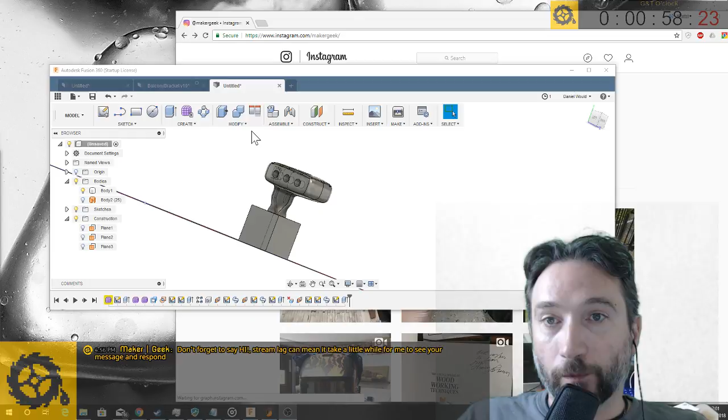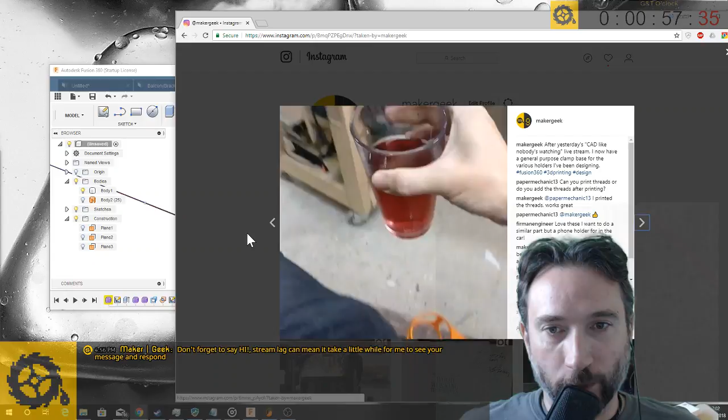Only a couple of pictures to offer, but yesterday in this very show we were modeling up this bracket, which I printed overnight, bracket and screw clamps, so I could take the various mounts I've been using that started out as mounts for my balcony railing, and now I'm like, well, I can multifunction and use them. The screw threads work fantastically, fit really nice and snug, didn't have to do any adjustments, just right off the bed like that. Here I'm attaching it to a little side arm that I put on the side of my Franken chair, which if you look back a couple videos on YouTube you'll see, and just checking it out as a place to hold my drink while I spin on my chair.

So very happy about how that came out. That was some excellent work yesterday. This little experiment of spending time on CAD is already paying off as I actually do make more things.

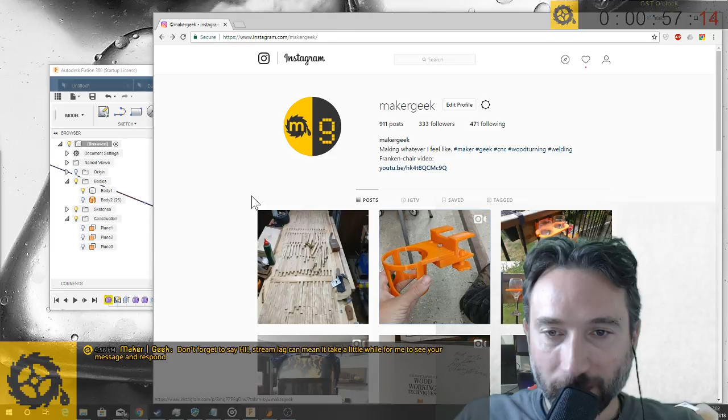The other thing I spent doing, which has been my perennial background task, is CNCing all of these tiny little pieces of wood into little ripples for this absurd door idea I've been working on. It is coming along. I've got all the pieces done pretty much for 2 of the 3 panels, starting on the 3rd. Most of these aren't really stuck down or finished yet. I want to make sure I keep everything in line, so I'm probably going to get as many of the pieces done as I've got, and then start gluing up vertical lines all the way through all panels and across that way. So that progress abounds.

Anyway, let's talk CAD, my goodness. Yesterday at the end of the stream I was starting to play a little bit in sculpt mode, and I decided to spend a little more time on that this morning, so I wanted to show what that looks like.

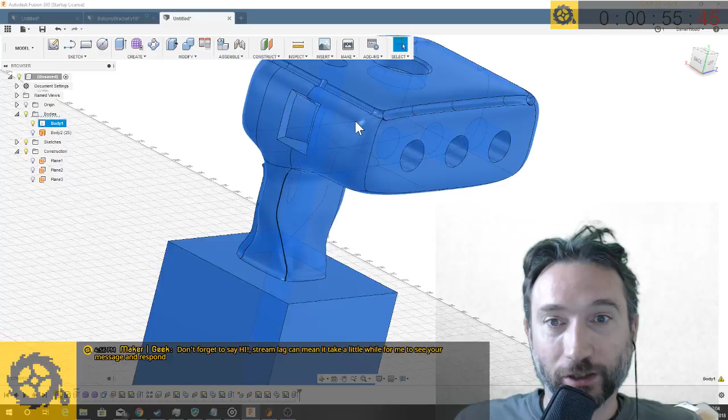Now this isn't anything in particular, this was just me experimenting with creating a sculpted object and bringing it back. So this is now a body - literally this body. It's a regular solid cube attached to this thing, and I've cut various bits and bobs into it just to experiment with what that means. At the end I'll probably go back into Sculpt and revisit some of this stuff to get it more settled in my brain, but I'm really starting to see the power of that. I think it's going to be quite awesome, particularly when I want to do copying of things.

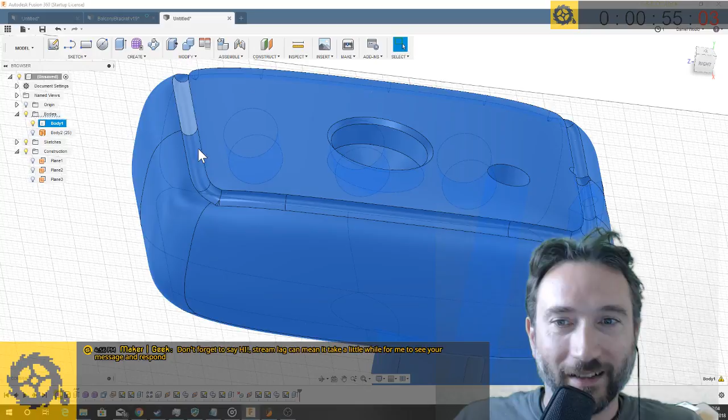My wife is really keen on making a chess set, and I think we're probably going to do that using this mechanism. So I will come back to this later. But if anyone has any questions about sculpt mode and what I've learned in my incredibly brief time playing with it, I would be very happy to try and share that.

In the meantime, I think the main thing I'm going to spend time on today is making a model for dust collection for my CNC router. I've been running it for the door for quite a bit, and I don't have any dust collection on it. I just hoover up after each time, and that works for me most of the time, actually.

But it would be nice to have the ability. I did have one a long time ago, but I've since changed everything around, and I'd like to do something a bit more sophisticated, and now I have a 3D printer, that is an option.

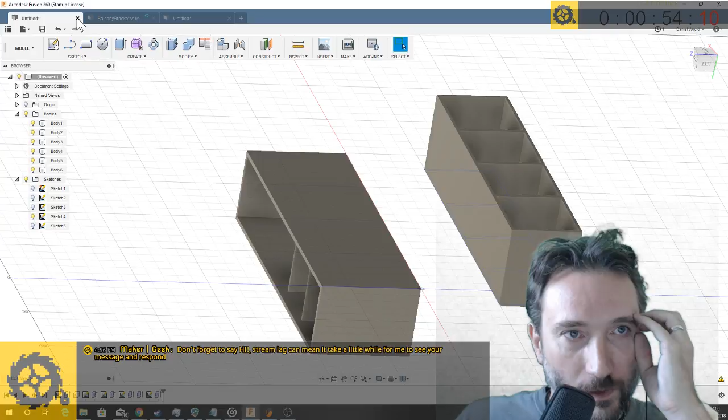So that's what I'm going to focus on. Let's just get rid of some of this stuff. Don't save that. And if anyone has any questions, jump right in and ask them, I will always try and answer if I have them. And if there's anything they want me to dive into whilst I'm doing this, feel free to ask.

Okay, so the main reference point I have for my dust collection is it's an 80mm spindle, and that's pretty much the only thing that is really fixed. I think I have a limited amount of space behind the spindle, so there's a limit to how deep I can go with that.

I'm going to guess that I probably want no more than a 10mm exterior on that. That's not quite right, is it? That would be, I want 10mm either side.

Pretty basic starting point, I guess, which is a ring that will actually fit around the spindle. Now, I've seen some designs where...

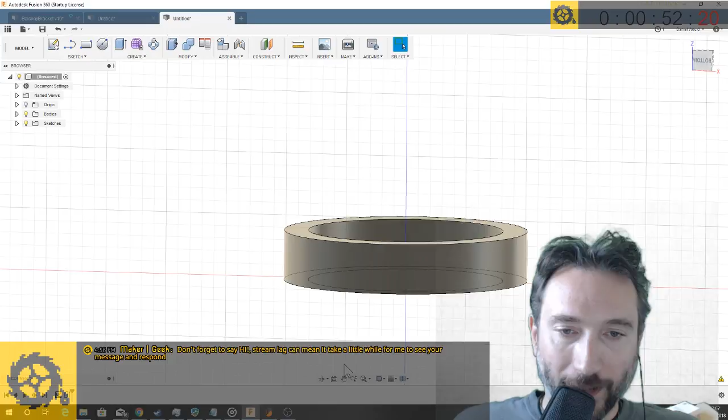it's sort of a two-part mechanism, which is the clamp around the spindle and the holder for the vacuum collection, and then magnetically attaching to the bottom of that the actual dust shoe, which has sort of bristles and such. And I think that is the way I would like to go.

I also would like to figure out how I want to actually clamp on. Again, I've seen a few different options. I might just go for the straightforward approach - cut a slot out of this and put some mechanism that I can use to screw either side.

What I do want is to think about - let's come up here again. Now, the hose port is, well, that's a good question. Exactly what do I want to do? I can probably use the dimensions from my own 3D printed hose nozzle to figure out, but I think we'll go with about 35-ish, and I can always adjust that later if I need to.

Where I think things get quite interesting is trying to allow for the hose to come in maybe slightly at an angle from the main bed. So we're going to try that and see how we get on.

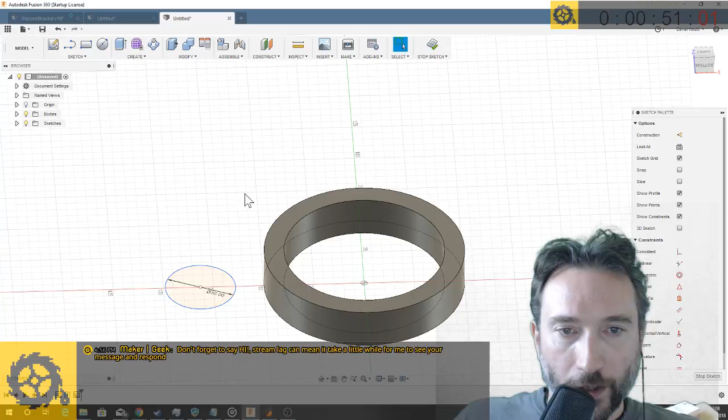So I think the fairly classic profile for these things - let's sketch. I really want to pick up off the edge of there. Actually, let's do this as a spline. Oh yeah, I'd forgotten that they do these new spline points.

That's what I want to do. Come here, turn on the first sketch, that's what I want. Turn off the body. Why is that sketch not active?

Because I'm not on the same sketch. I probably do want to be. Let's delete that bad boy. Yep, forget it, go away. Come back to here.

I want to edit this sketch on this occasion because it'll be convenient to connect things together. So let's just reference off that center line. We'll have 35, and then we will spline ourselves some nice kind of exterior profile that can connect up to that.

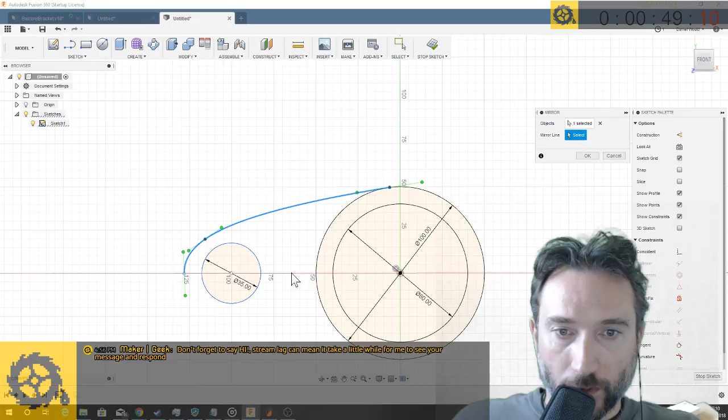And then what we'll probably do is mirror that over. Come on. Oh, I forgot that you don't default to getting the axes as mirrors.

Let's create a construction line. We'll just, that'll do. And then we'll mirror across the construction line. And there we go - nice exterior profile.

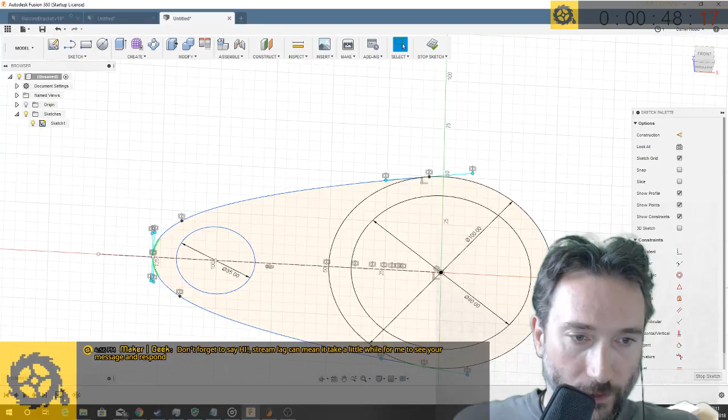So, actually I don't want to do that. I want to come back to here where I'd already extruded. Come on, move the timeline. Oh, stop sketch. Now move the timeline. Modify this extrude to now include that as well.

So, how am I going to connect? The trick with dust collection is you need enough space to not get clogged up with debris, but not so much that you lose suction. So I think a lot of this material needs to come away as part of connecting between these two points.

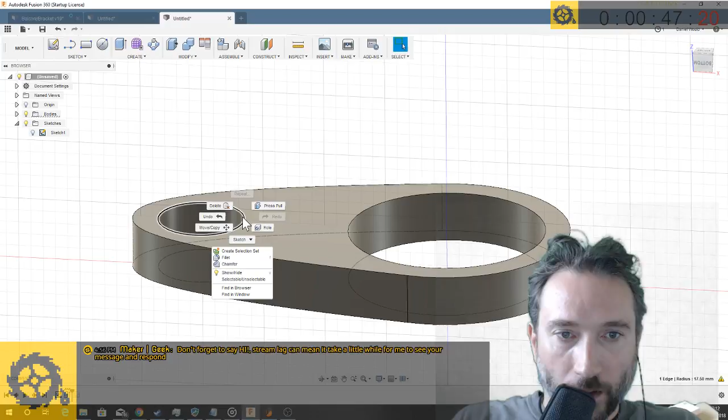Actually, I'm also thinking that I might want to twist this whole thing so that it's not making a sharp corner, so that it comes out at an angle. Maybe that would be a nice thing to try. Can I? No.

Yeah, so actually that does make more sense. There needs to be a round port somewhere for the hose to connect into snugly, but I think the way it should access it down towards the spindle base is a more directed path without that sharp corner. That is what we'll do.

Let's sketch on this plane for a second, because this has got the spindle in it. And in fact, I tell you what I'm going to do, just so that I have it to reference off of—let's give ourselves a spindle to look at.

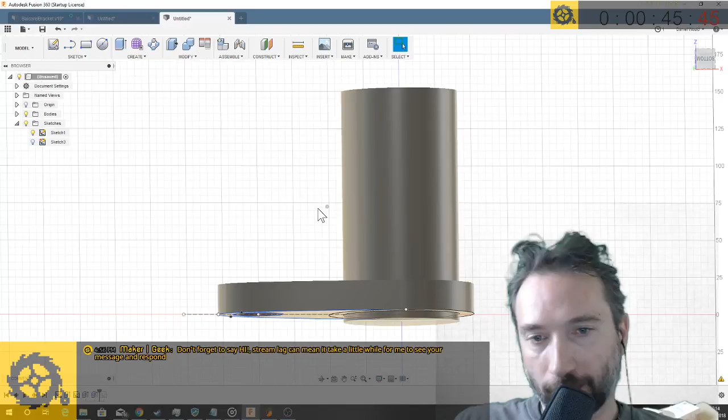New body. Let's come down by a smidge as well. Okay, so let's assume that broadly is what's in the way, I guess.

So I want this—oh, did that join? Why have I got only one body? I thought I said new body. I obviously didn't select it properly. That's better. Oh, right, yeah, so that's why, because I extend in both directions. Got to pay attention.

So those can come together. You and you, and you, and you join.

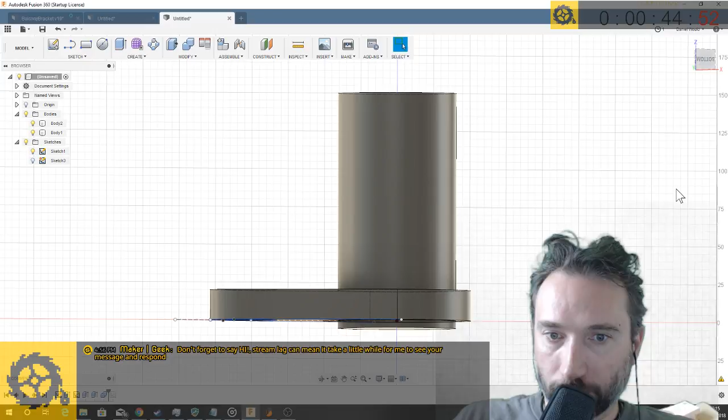Right, so there's a clamp that needs to be figured out exactly how that pulls in. And maybe, say, if I cut a wedge that way, I could probably have just like an Allen key screw in diagonally that just pulls that together. That might be quite nice and low profile.

I think I can get away with this being a little bit closer. And then ultimately I want...

So let's modify our first sketch again. I think you can come in a bit. Come on, I want to move you, please. Move you in like that. And let's move you in a bit.

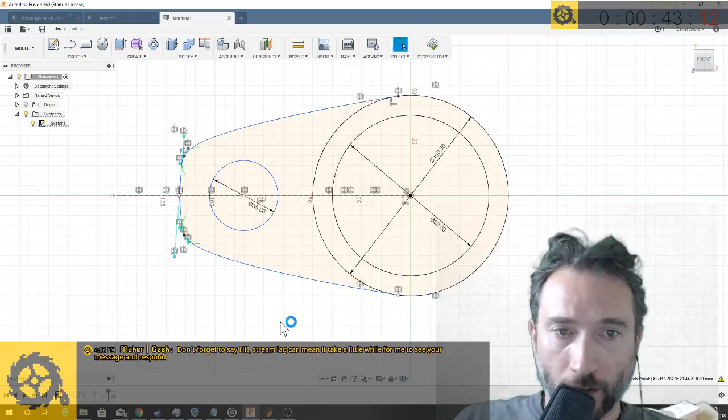Okay, and let's just modify our... modify our spline. Ooh, that's exciting, spline line. Just neaten that up a little bit. So that's a little bit more tucked close.

And what I probably want to do is have a turret here that comes up more, and then that port. So in fact this might end up being the bottom. I kind of want to curve a path through.

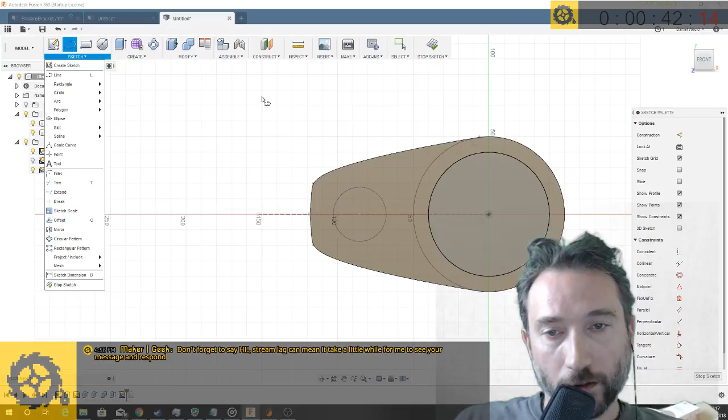I have an idea. I'm just going to fill that in for a sec. I'm going to sketch on this top plane. Let's take an arc that is—do I need an arc, or can I? I could probably just use... let's...

And so I want this to come up more like that. So there's a more solid body, and we'll refine that momentarily. I don't really need all that guff.

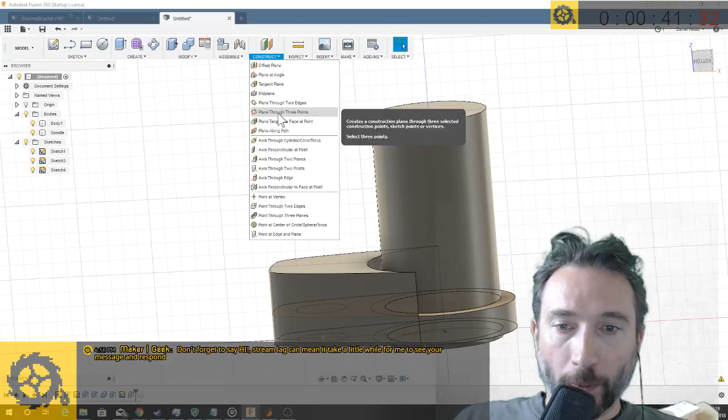And so I have this idea that if I create a construction... what do I want? I want a plane... I mean, actually, do I need a new plane? I guess I'm already on the origin planes, right? I think I'm already on the origin, so let's try sketching against this plane.

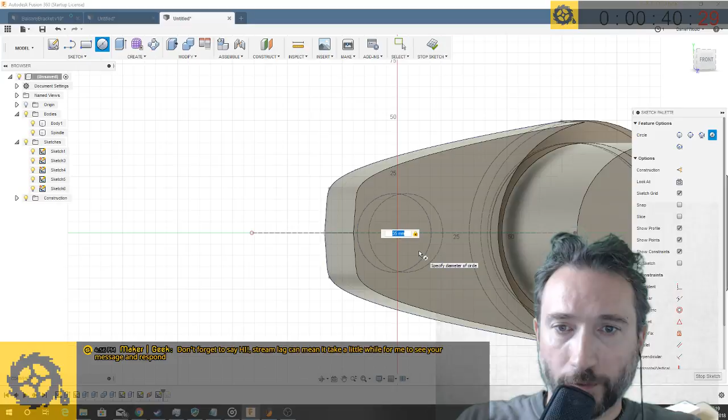So what I'm thinking is if I create a spline from kind of here, like that, so I have this curve running like that. Now I'm going to create a plane along path, select that, and then I'm going to draw the port on that plane, 35, comma, and then we're going to go a sweep of that profile along that path.

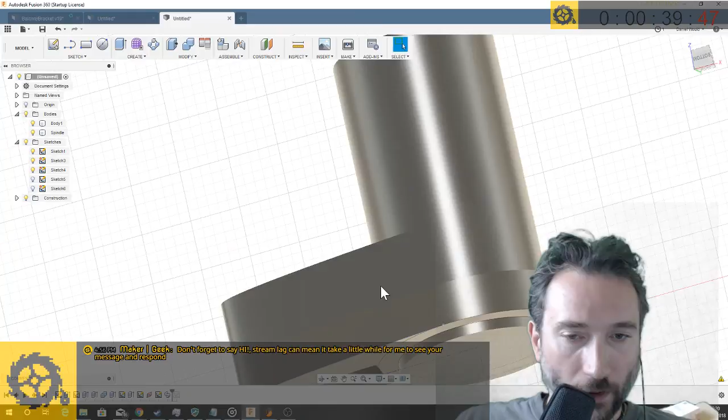Look at that. So let's say yes to that. Now I think I probably want to cut out of there as well, but that's the sort of idea I was thinking of, which is we'd have a smoother transition through that path for the dust collection, so it doesn't have a corner to deal with.

And I can probably actually kill that part of this circle as well, because whilst I have the spindle there, I think I'll probably in reality have this thing clamped more right flush with that. So I want this hole to be pointing down, and there will be a shroud around this.

So let's just come back to our path here. So you cut, right, and you literally—because that's the end of my path, I should have drawn my path a bit longer.

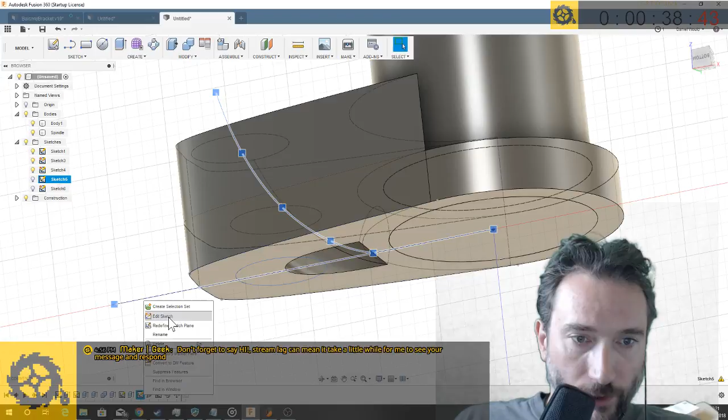Let's do that. Not that sketch, this sketch. So I kind of want to just extend out that spline from that point, just bring it down to there. Okay, and now let's edit this feature and select the full path. Boom.

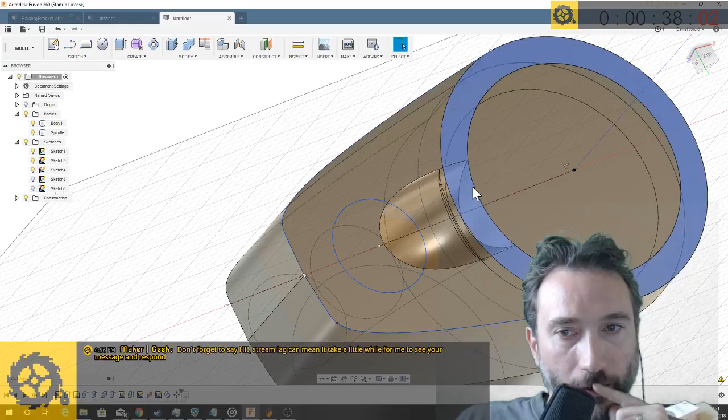That's kind of what I'm thinking. It's a shame that you have this, but I think that's probably okay. So hopefully all of the airflow will be pointing pretty much down. If you think normally your spindle head is around here, I'm going to have a magnetized base. So that is pretty good.

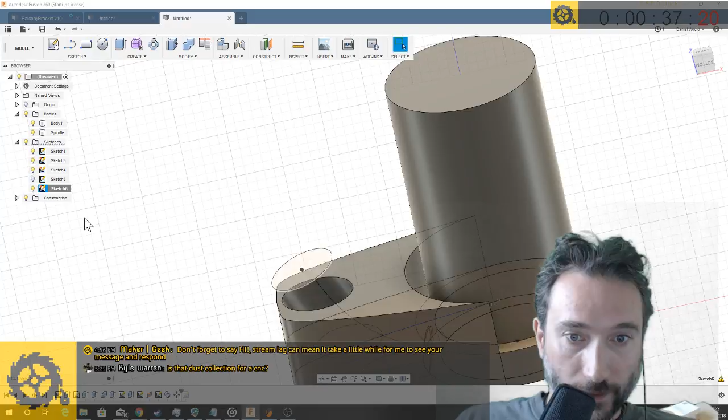And in fact, so there's my circular section. I kind of want to let's switch this sketch plane back on and edit that sketch. What I want to do is create what will be the outer circle. Let's make him 45. Excellent. And so what I should be able to then do is extrude him down.

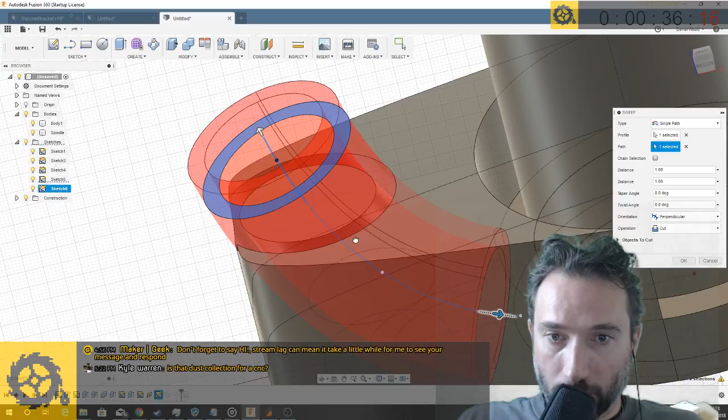Does that look right? See, the thing is, I'm not following the path with that extrude. What I want is, okay, let's see about doing another sweep of you along this sketch plane, but only come this far, and do a join.

Beautiful, beautiful.

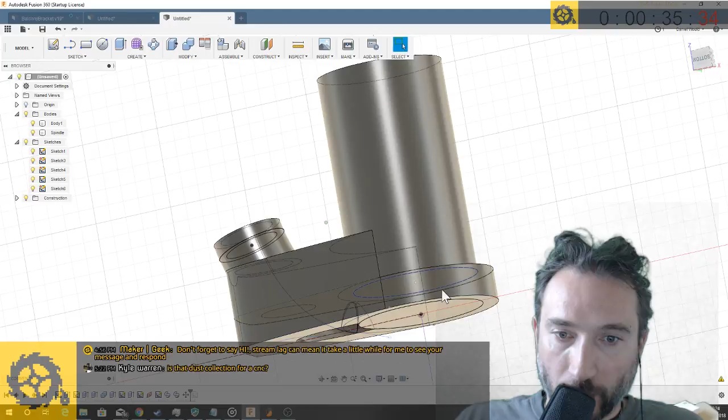Yes, Kyle, that is dust collection for a CNC. That is the idea, at least. I've had spindle going for a while, and I don't have dust collection at the moment. I'm going to steal an idea where I have the dust shoe as a magnetized, separate piece. So this is just going to provide a mount point for a standard hose connector that will clamp onto the spindle, and then separately I'll design the base and try and get some bristles sorted out.

What I want to do now is clean up some of this gubbins that doesn't really need to be there, and there's already a clamp around the spindle itself which is holding it to the machine. So I need to let's just get rid of some of this stuff.

Let's just arc it. I kind of, we'll go to the midpoint and we'll just trim like that, and we'll mirror you across. That construction line is not on this sketch plane. Let's create another construction line which is on this sketch plane.

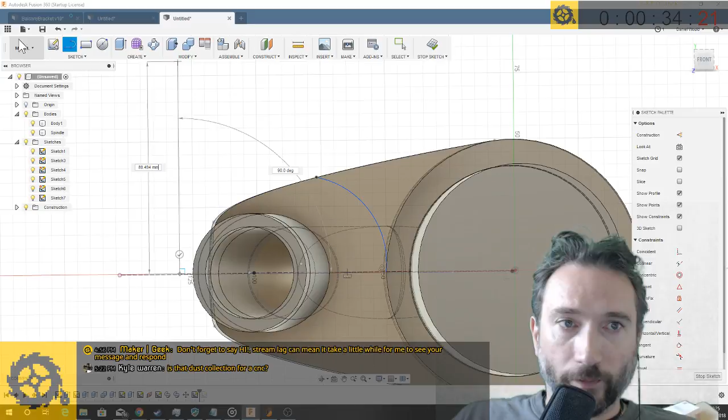I want, come on, like that, and then now we'll mirror over that guy, and then I can just chop off those wings like this. Now hopefully I'm going to do that without issue.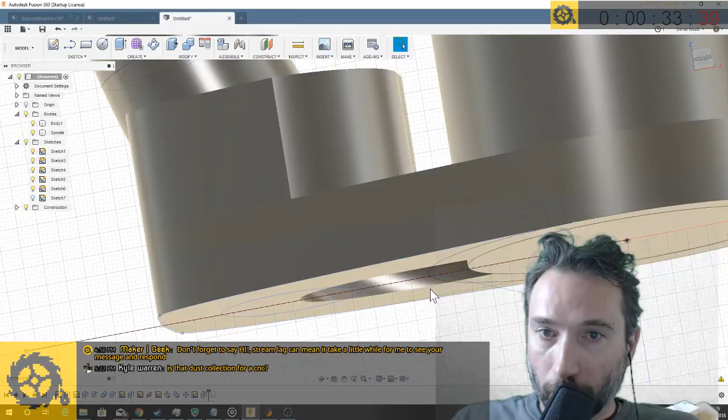Good. So this really just becomes pretty much just material to provide that directional connection. Hopefully that will be out of the way of my current spindle.

So I still need to do the clamping mechanism, and I think I'm tempted to take a leaf out of the Prusa book, and we'll just create like a wedge, maybe. If you see where I'm going with this. No, come on, just that. So you'll be a wedge, and then we'll draw a circle on this guy.

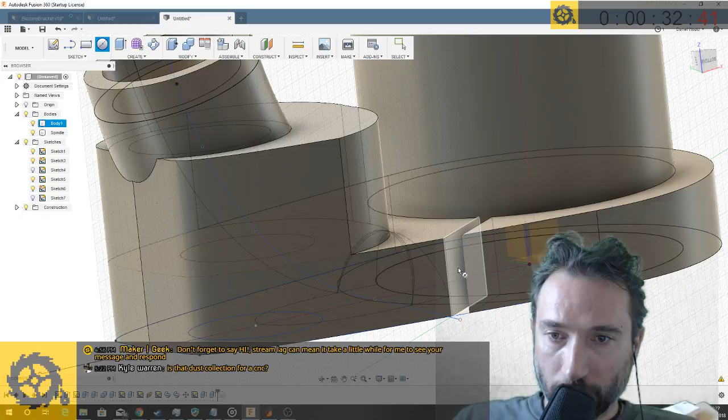It doesn't really need to be. So we'll make him an M5, I think. And what we'll do is we'll punch that out like that. Yes, please. And we'll turn that sketch back on and we'll punch him in a bit. So we've got a hole through there, and in theory I should be able to create a slot.

Now, do I want to do that? I could just thread the hole. Do you think threading the hole will be enough? I mean, I've had reasonably good success with large threads. This is quite a small one. I'm going to need to flatten off this connection, or at least I'm going to need to make a larger thing for the head of a bolt to rest against.

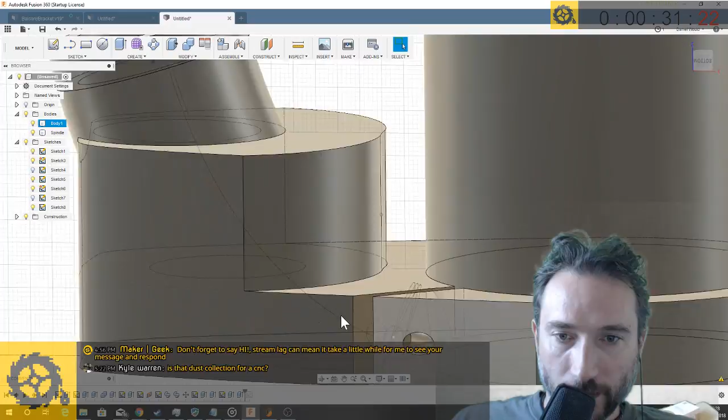Now the CNC. Well, let's try this. Let's do it this way, because this is how. I don't want to edit that sketch. I want to create a new sketch, really. Let's sketch upon you, please.

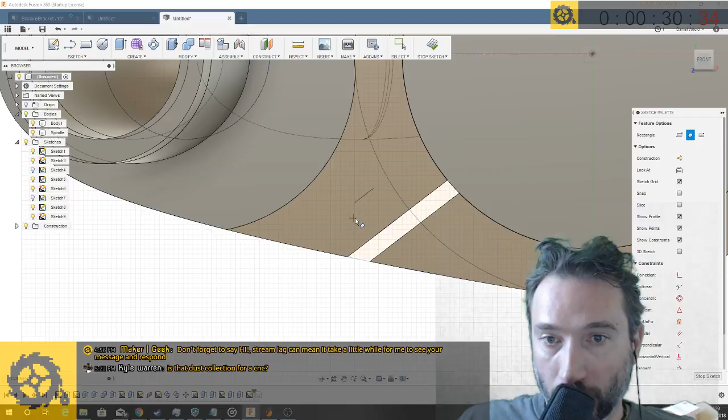And what I want to do is create this at a weird angle. So basically this is just to make a recess to drop a nut into that sort of backs up that hole. So let's do it this way. Just check that I am on center for that.

So if I do something a little like this, and then drop you down until you intersect. So in theory, you could drop your nut into that, slot your bolt through there, and use that to clamp everything together.

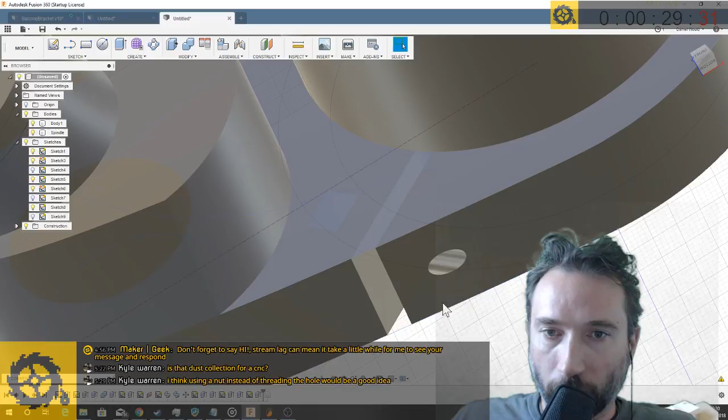Yeah, I think you're right, Kyle. I think the nut will be stronger, particularly at M6 or M5. It's just going to give a little bit more grippy. I may need to come back and refine this once I've checked what kind of hardware I have hanging around. But I do need to flatten off this fella.

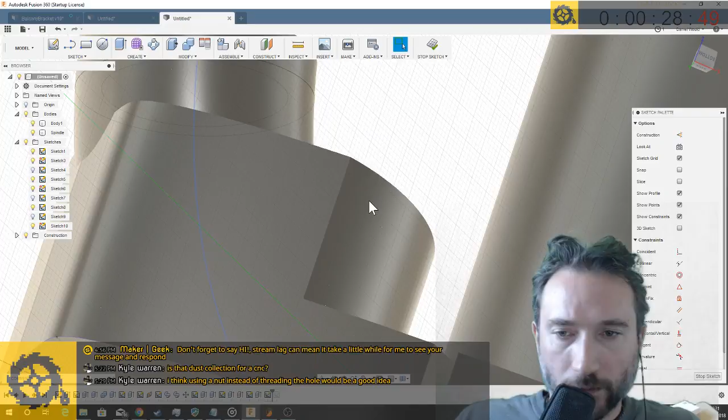So what I would like to do is probably make another plane. Actually, do I need to do that? I could just, for the sake of argument, I'm just going to use this plane. So if I just make, let's say, a 10 mil circle like that, spinny again, and then we'll just extrude you through there, and actually I might say join.

There we go. So that just gives a nice flat surface to actually screw into that hole against.

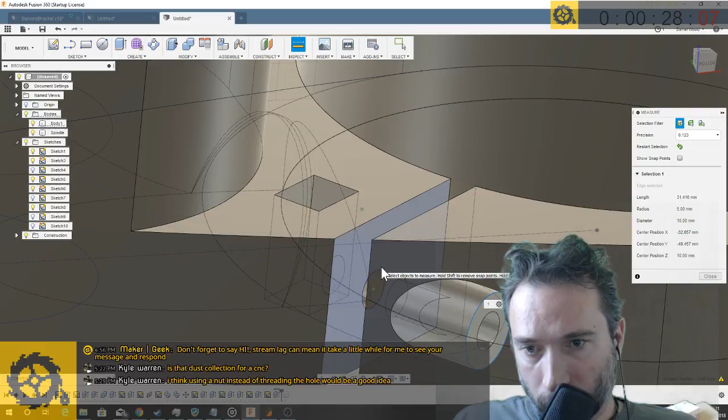Let's just check the measurement. From there to... where do I want to check it to? From there to there is 30 mil. Might be a little... no, where did I get 30 mil from? Oh, it's because that's the selection. 17 mil, that's more like it. So a 25mm bolt will do the business there with a nut in that. That should give us a pretty nice firm fit.

Yes, I am planning to 3D print this, so I think I'll probably print it in this orientation, so it won't really need supports. These holes might not come out beautiful, but I can always drill them out, particularly since I'm using the nut, so I don't think that's a concern. Actually, I think that's another advantage to having this fairly swept hole.

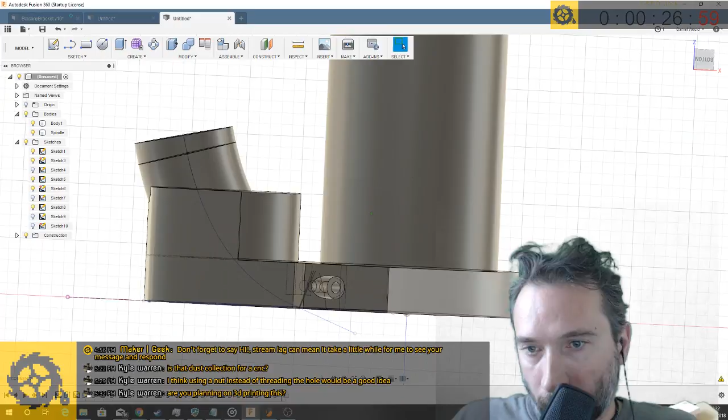I'll print it in PETG because I love PETG at the moment. It's my favourite material, it's nice and strong. I don't know that I need this whole height, but for the moment, let's assume we're okay.

So what I'm going to do now is put some recesses in this bottom surface for magnets, which will hold the actual dust chute itself on. Now I have a bunch of, I want to say, I think they are 5 by 5 mil.

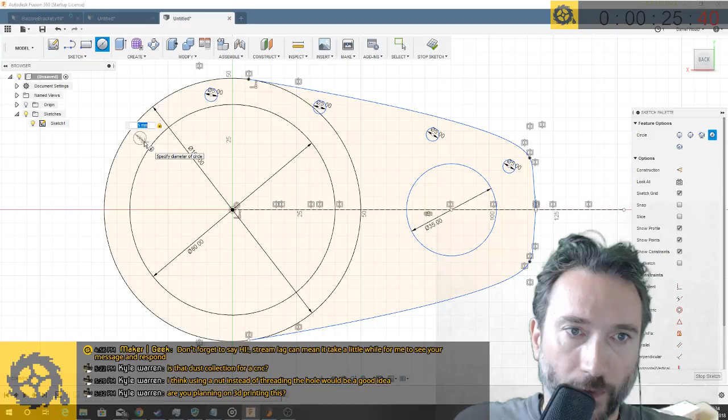What would probably be good is... actually I could probably just eyeball them. I reckon if I just stick them at somewhat reasonable intervals, then we'll end up with reasonable holding. The important thing, I guess, will be to line them up on the bottom side. I want enough that it's definitely going to be held securely.

Let's mirror those over that. Forget the other side. Very nice. And then I should be able to just extrude all of those guys.

Actually, I'd probably need to stop sketch, come back to current day, now extrude these guys down by, I think, I want to say 5 mil, 5 by 5, that's what they are. Let's just get the last part of that as well.

Comme ça. And bar 5. That's a little bit close to that clamping point, but that's not so bad.

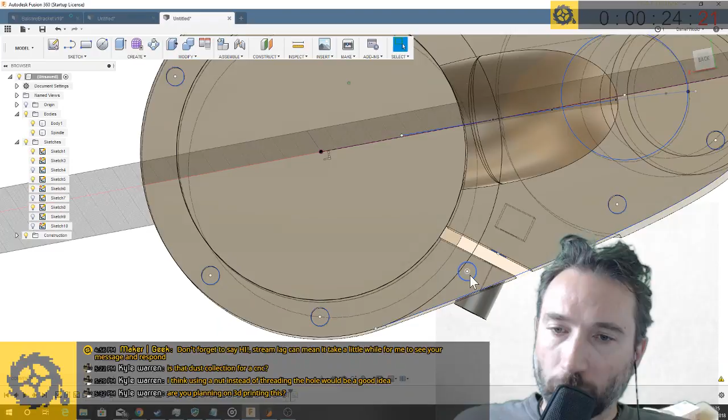Oh, now there's an interesting point. I mean, I guess the magnetic base will be fairly forgiving, but obviously if this is tweaked in, it will mess with the alignment a little bit. But I think, switch off the spindle.

That is going to be the basis of my dust extractor. Now, I'm assuming at this point that my dust extraction is going to come out on the left side of the spindle, and I'm going to be tightening in this way. It occurs to me that may not necessarily be the best option. Where it's currently positioned, it's probably easier for the dust extraction to come in from the right hand side.

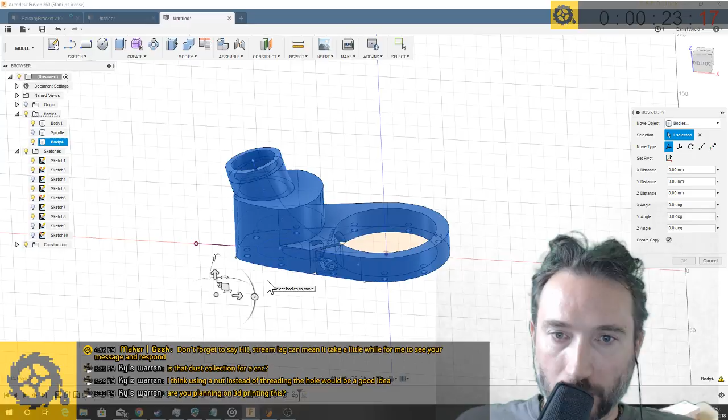So let me just mirror this fella. Move copy, let's create a copy, and actually, do I want to create... no, let's literally mirror him. Not faces, I want to mirror the body, thank you very much. And the mirror plane might as well be that.

Excellent. Oh, I could have two, I could literally have a port on each side for double the extraction, although that would really not work very well. Okay, so this would be the version I'd probably actually use, because then I can have dust extraction on the side of the machine that I want to drive it from. Pretty happy with how that looks at the moment.

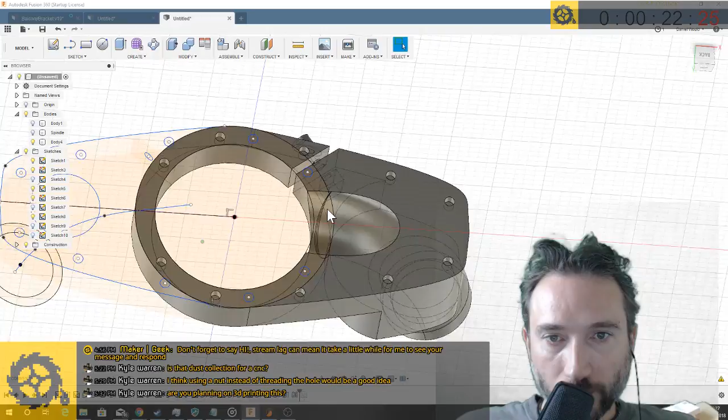Now, gosh, my goodness, it's 5:37 already. I'm not going to do the base to this right now. I'm going to switch back to doing a little bit of playing in sculpt mode because I need to practice a bit more.

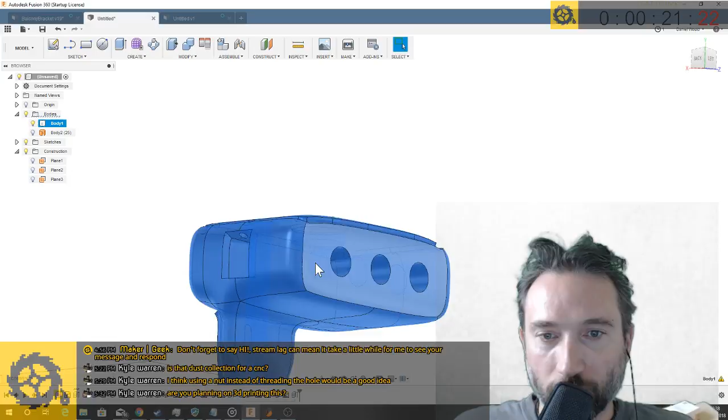So Kyle, I don't know if you saw me at the beginning of this. This was something I played with earlier today. It's nothing in particular, I just created it in sculpt and played with some techniques, figuring out how to take a sculpted T-spline body and turn it into a real solid object. I did a few things like cutting a profile along the path left between some panels, cutting out some hexagon stuff, drilling some holes, boring a hole all the way through it, just to experiment a bit.

But what I'm probably going to do is start from scratch and repeat a similar-ish exercise, mostly because I need to get it in my brain how this works. So let's start with a whole new file. What I quite enjoyed was that you can define parts of your model classically, I guess you might say.

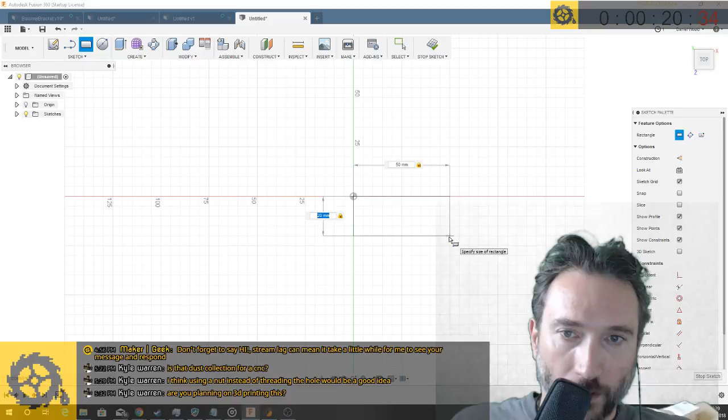So let's say I have a 20 by 50 mount point, which is basically just a box, that this is going to be something I want to connect to something a little more ambitious. So let's create our form, enter the sculpt environment, and create a box for the moment, I think. We'll make him kind of yay big.

So there are a bunch of things you can specify when you're creating them about how many panels, which is kind of cool. So I can have panels in that direction, and panels in that direction.

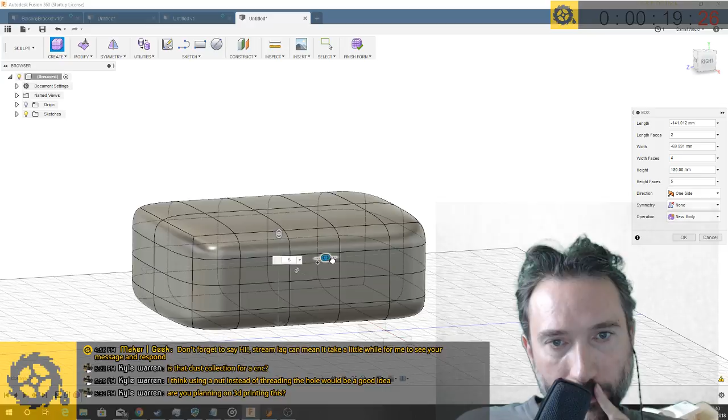So let's do that. One of the things I learned earlier was to stop thinking of this like a solid object. It isn't a solid object at all. Part of that is you can delete faces just like that, and it magically joins them all together again. The other amazing thing, double click selects a whole continuous ring.

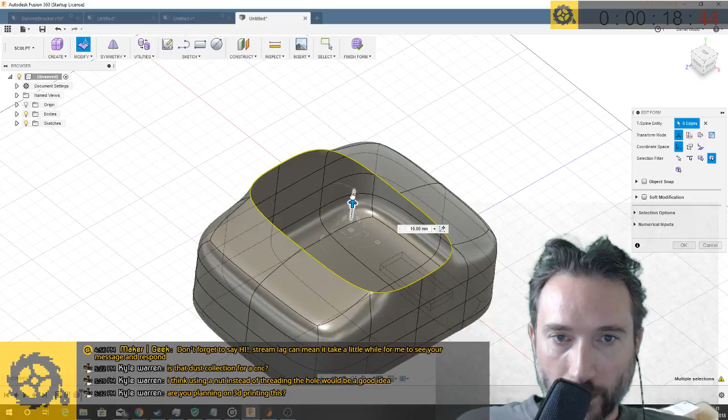So if I edit this, I can drag it up and down, and that's one thing. But you can also hold down Alt and pull up, and it adds another set of panels. Do Alt again, adds another set of panels. Do Alt again, adds another set of panels. Every time you do that, you end up with a more straight thing. So it's an interesting way to loft between what was a shape and spurn off to one side, which is pretty sweet.

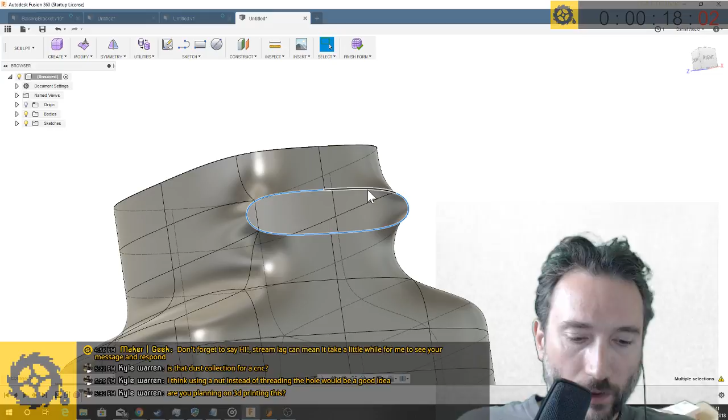And I kind of want to experiment with doing that. Let's do it this way as well, just because I feel like I need to understand more intuitively what that means. So let's press Alt and give ourselves a bit more, and a bit more. It's an interesting way to be able to create these offshoots and such.

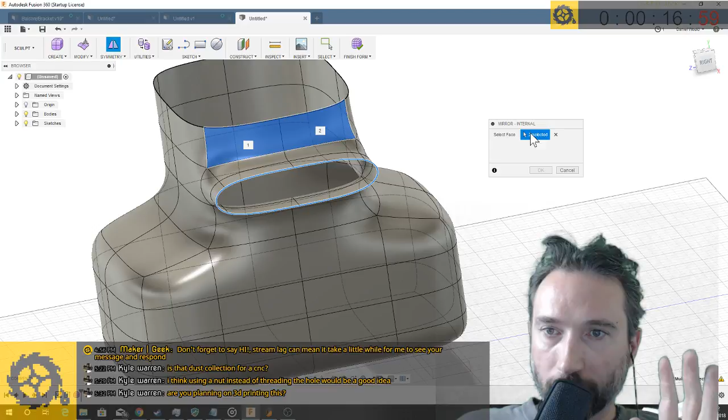Now I don't have anything particular in mind at this point to model, so something else you can do is define your symmetry. Let's try doing that. So if that's the front and that's the back, I thought that is sufficient, but it's not giving me an OK button. I don't know why. In theory you're supposed to be able to define the front and back that represents where your symmetry line needs to be, and then it will help you maintain symmetry from then on. But possibly I've already done too much damage before telling it that, and it can't figure it out.

Okay, for the moment, I just want to play with this, because you can move points, lines, or whole faces. So that's moving that point. Which creates some really interesting dynamics.

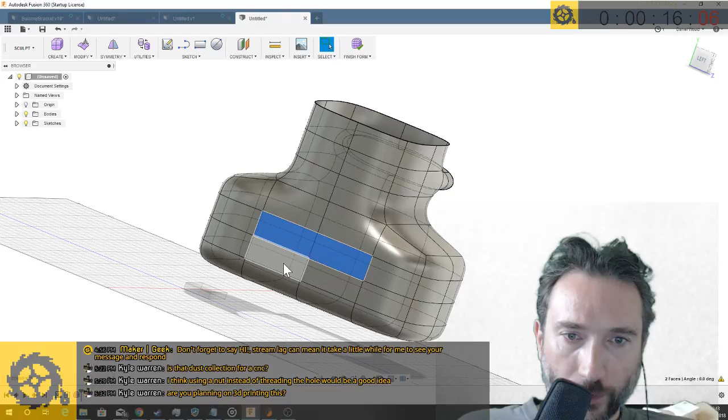It probably would be more useful if I had an idea of what I wanted to achieve, but I'm going to try and push this fella inside. So if I do this, holding Alt again to give myself an extra - oh no, that's not what I wanted, I selected the wrong control. Come on, that guy. And in again.

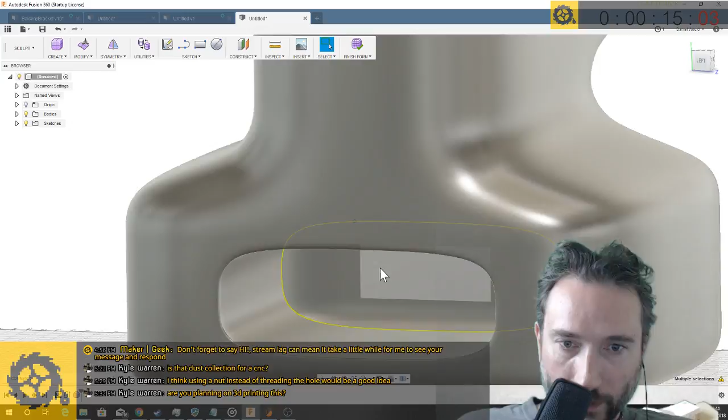So that's very cool. I think this for 3D printing could be quite interesting. You could make objects that you print with internal kind of ducting and such, which is perhaps a little easier to do like this than it would otherwise be.

So what I should be able to do with this as well, if I edit form, now I should be able to rotate that entire thing like that. Oh yes. And now if I do that, that's pretty sweet.

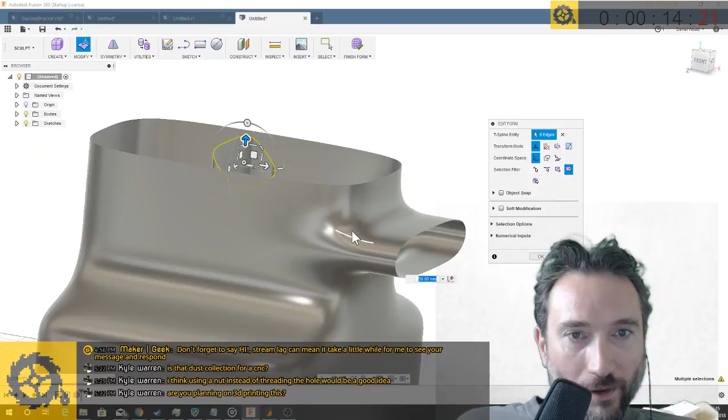Now I'm going to reduce that and bring him up again, bring that up to here, and then flatten him out again. That's so cool. So now I have a path that runs up through into here. I have no use for this at all, other than the fact that it seems pretty sweet. I wonder if I can create a connection between this guy and this guy.

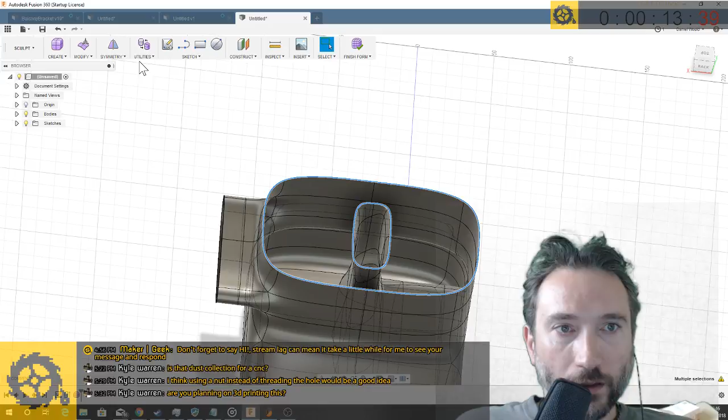Oh, no, that's not what I wanted. Don't do that.

I kind of want to patch between you. Bridge, maybe? Let's see what happens if I bridge, because that is something they used in the example. Let's bridge it, between you, side 1, and you, side 2.

Ooh, my goodness, what is that? If I select OK... well, that worked. So now I have this weird structure with an internal whatnot.

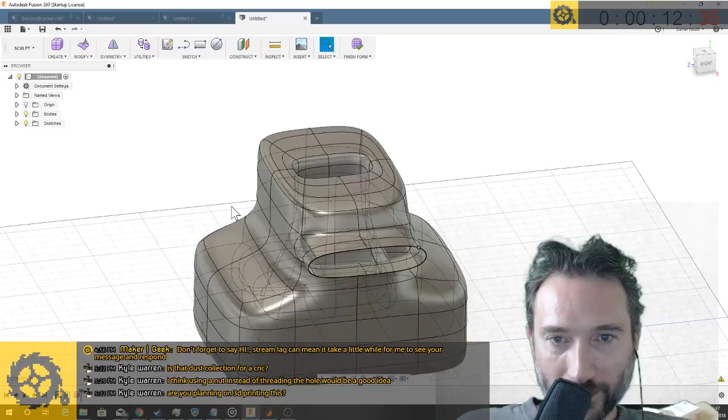Okay, I'm going to try now to make this notionally solid. I'm going to try and join this end to this connector, which doesn't do anything, but it's interesting. Let's just move this guy like that, and let's rotate him around like that.

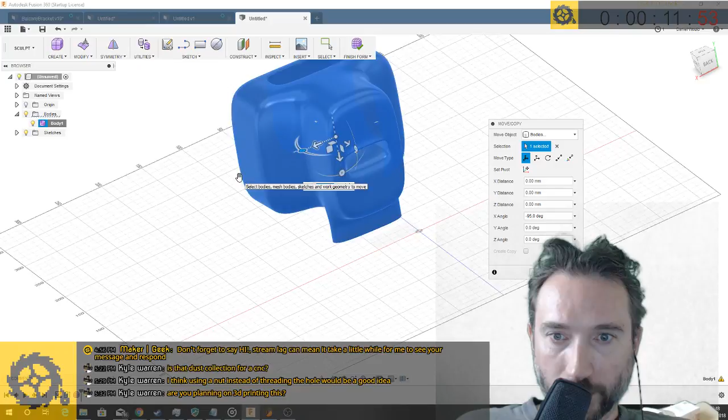Ooh, I'm completely off on a weird axis now. 90 degrees, no. I've got myself somewhat at a weird position. Okay, let's do this.

Now convert, this is where things get pretty crazy. So B-rep face to T-spline basically means I can select the face of a body that exists in the main area and map it into a T-spline face of its own, which is cool.

But what you then do is, much as I did with this previous thing, if I delete - no, don't delete all of them, just those 4. Delete these 4. Edit this guy.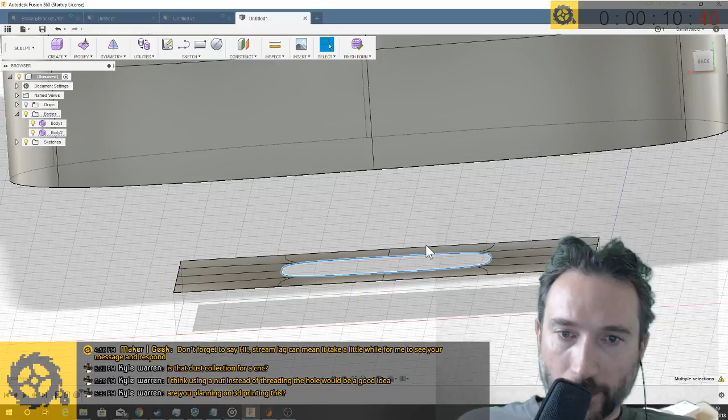We'll bring him up a little bit like that, and then we'll Alt to get ourselves another, and then Alt to get ourselves another. And now what I'm going to do - oh yeah, I should probably actually move this guy a bit more usefully. You see what I'm doing?

He can go over there. I mean, this is a ridiculous mismatch, but now you can use that bridge thingy again. So if I do that for side 1 and that for side 2...

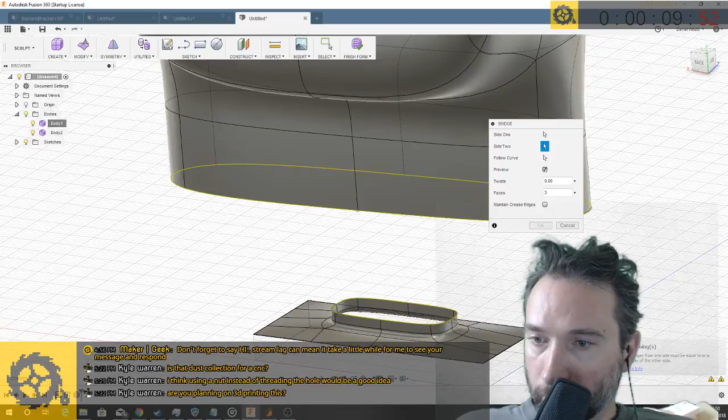The edges from one side must be equal to or a multiple of the other side. Oh, so I've got 1, 2, 3, 4, 5, 6, 7, 8 edges on that side, and I've got 1, 2, 3, 4, 5, 6 edges on that side. Interesting.

So if I split these 2 end pieces, then I will be in the same boat, I believe. Insert edge. I want to insert the edge the other way. Minus 50, minus 0.5, comme ça.

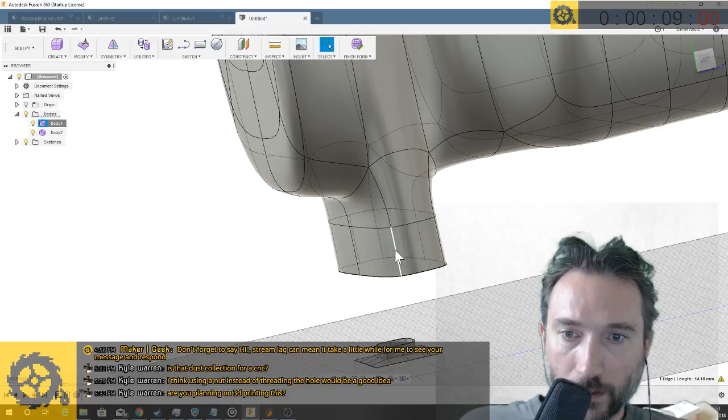I think that does that. And then let's do the same thing on this side. Repeat insert edge. 0.5.

So that, if I understood the error message properly, should mean that I can now bridge, because this has the same number of... and just like that, just like that. Look at him, he's beautiful. Okay, so now I can say finish form.

And we're back in regular model space, and I have my normal box and my T-spliney whatnot, which is not a real solid object at this point.

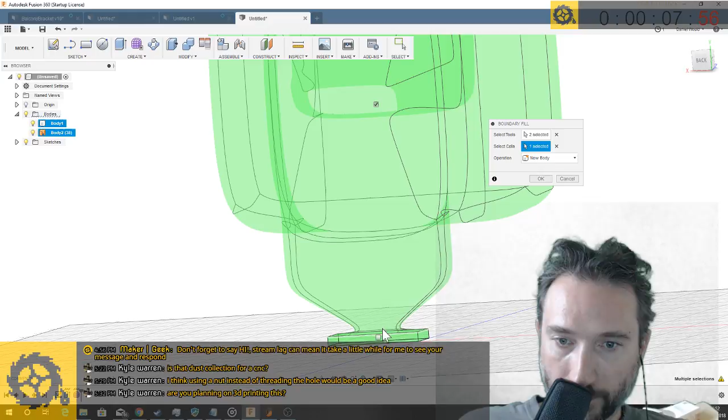And so you need to do a boundary fill, where you select him and you select him, and then you say, yes, I want that cell, and I want that cell. Go, new body.

And turn off that, I now have this guy, and this guy is a solid body with a really funky, weird, swoopy, centery thing for no reason. But so this isn't a real anything, obviously. But I'm quite excited about the possibilities there.

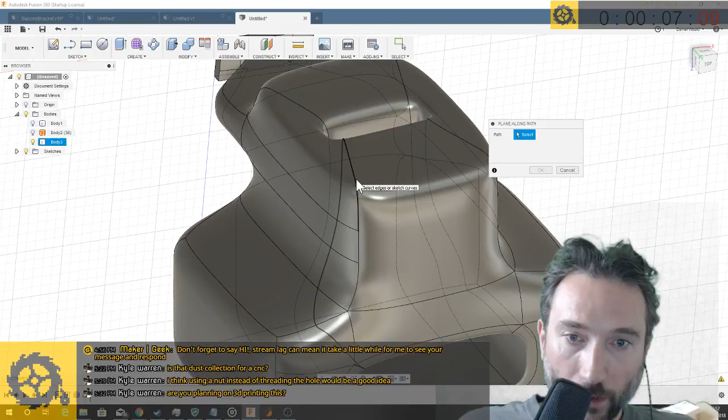And you can do, you've got all these interesting lines along the contours. And what I was playing with earlier was this idea of saying, create myself a plane along a path. So let's say this guy, and this guy.

And then once you've got a plane, you can sketch on him. So let's just do this and switch the plane on so I can actually see it. So if I do like a 2 mil, just a tiny bead like that, I can then say sweep my little bead profile...

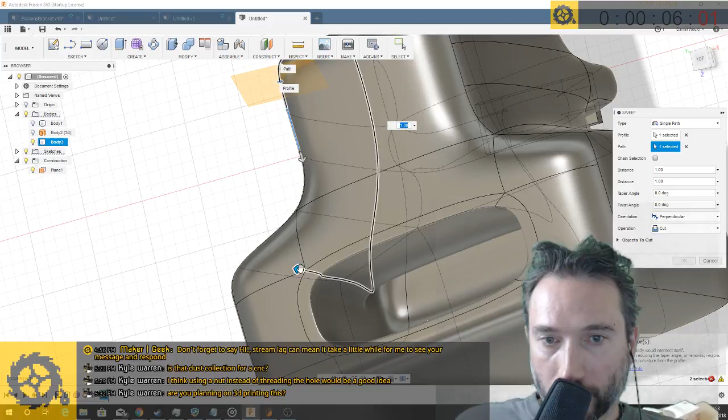Come on, show me the paths. And like this and like that. It's probably going to complain because that is a crazy amount of turning, but I can drag, come on, back.

It does not - paths are really weird to deal with because if they take too much of a jagged line, then they freak out. But there we are, that's sort of a bit more like it, and I can do that. That leaves me with this really funky little carved-in trenchy line, which could just as easily have been an exterior bead rather than a cove. I like it, it's got potential.

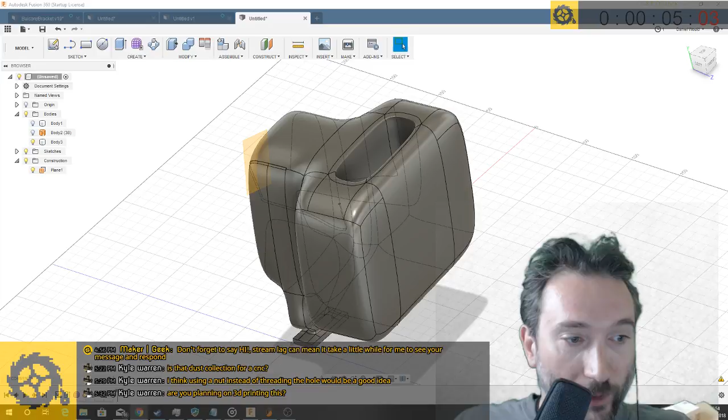I am conscious that it is a few more minutes before G&T o'clock. Let me just check my timer - 5 minutes to G&T o'clock. How about that? Any questions, Kyle? You're the only one here, so you have my undivided attention. If you want to ask me anything or suggest I check or try things, go right ahead.

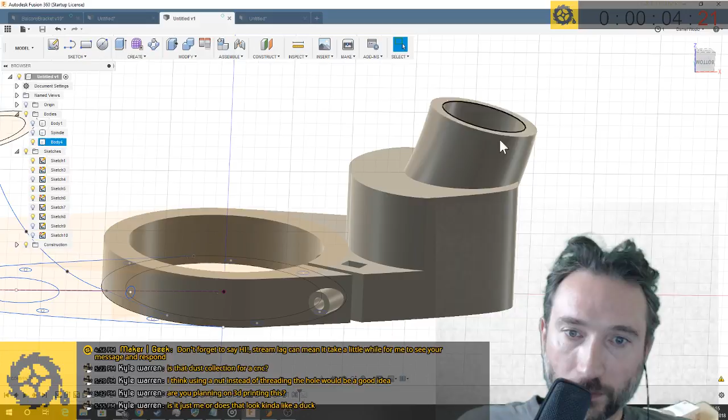I need to think a bit more about how to make the best use of this new interesting sculpt capability. Do you like this idea? I'm not sure exactly how useful this shape would be, but this is certainly not a profile I would have been able to do otherwise. If you look back at where I created a simple spline and rotated a nice easy circular pattern along it, that's all very cool. But now I've done this, I'm thinking I could potentially take a sort of regular circular port and flare it out - kind of like a duck with a hole in the middle, I don't know, maybe.

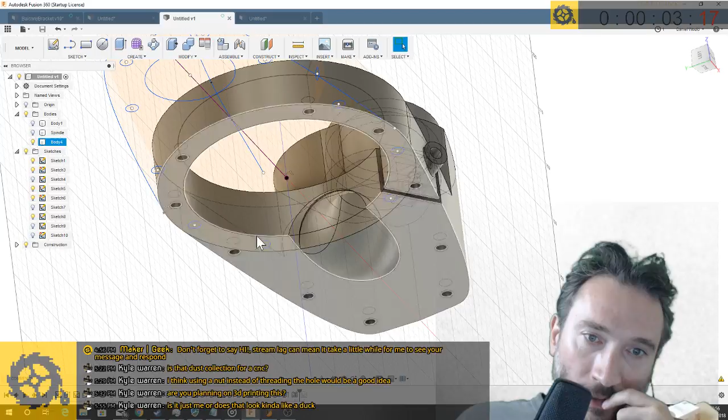But I do like this idea that I might redo some of that dust collection port so it has a standard circular top, but it flares out and round so it doesn't have to stay that just round profile all the way through, which could give me the opportunity to really flare this out more, which could be pretty useful. I'll have to think about how to do that. In the classic sense I could just carve sections, but there's something to this technique, I think.

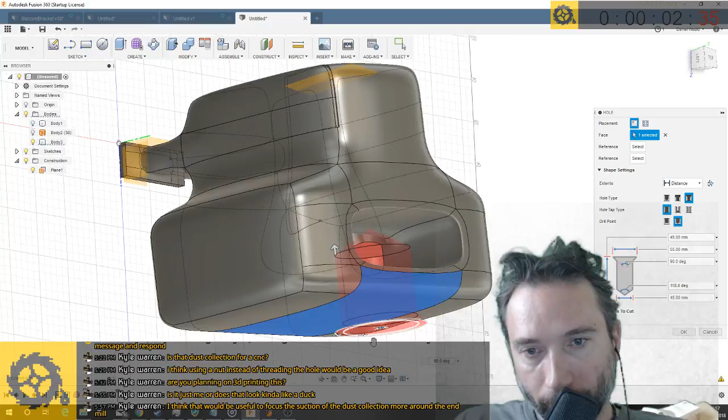Now, one thing is none of these are flat faces, so you can't use them as sketch planes - I discovered earlier, which is kind of annoying. But you can do holes. So holes work on faces, and you can position them however you want. That's fine, but I was kind of hoping when I played with it earlier that I'd be able to sketch on any of these and have the same effect, because it's not very flat. What I ended up doing was creating a plane nearby and just projecting a shape through.

Yeah, I think you're right - to be able to focus the suction around the end mill. Maybe I'll actually do something a bit more clever. I do like the idea that I'd have a top section and a bottom section, and the section that has bristles, etc., but the actual spindle is... well, let me just draw this quickly.

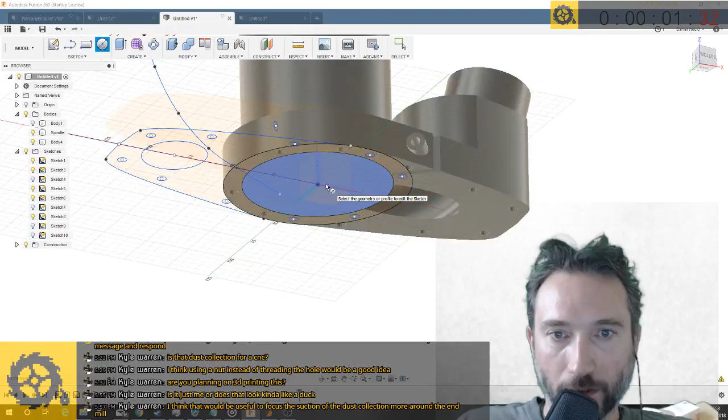So that's like the body of the spindle, but there's maybe a 30-ish mil diameter actual bit that comes out of there. I'm just trying to estimate how far down the actual end mill piece is, and it's kind of like there's maybe that much shaft. So you kind of almost want to extend this beneath this section and then maybe wrap around.

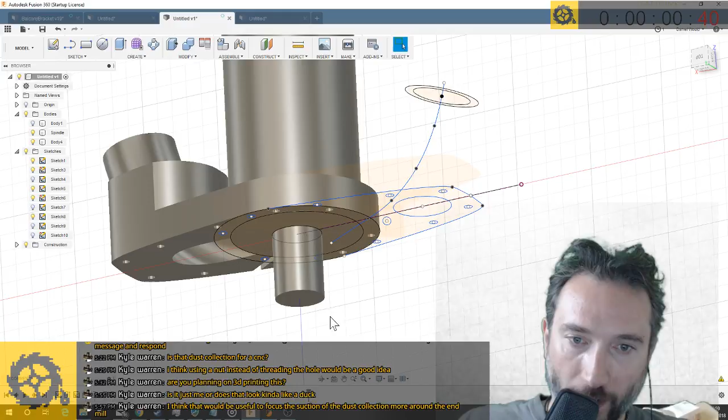The only problem is if you get it too small, then - particularly where I've been milling all these oak strips - that does not come off as sawdust. A lot of that comes off as really fibrous lengths, which just bung up the works.

Anyway, we are approaching the end of our time very rapidly. It is, oh my goodness, 40 seconds - 40 seconds until dinner at 10 o'clock. So, well, thank you very much, Kyle.